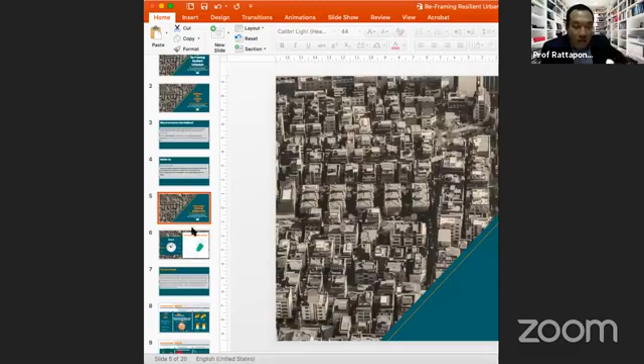Okay, my presentation. So now the audience, we are on the second session. Each of our speakers will explain the case study in their countries. Okay, please go ahead, Nadia. Can you see my slide? Yes, yes, okay, so my case study, I'll just quickly move forward.

Okay, so I'm Zone A, Zone A is again Nepal, Pakistan, India, Bhutan, Bangladesh, and Sri Lanka. I'm representing Pakistan. My case study is from Pakistan, in the province of Punjab, which is the most densely populated province in the country. It's the most urbanized, one of the second most urbanized, and it has a concentration of 5 very large cities.

Lahore, Faisalabad, Gujranwala, Rawalpindi, and Multan. A large part of the province population, because of migration and the attractiveness of these cities, is pulled into settling in these cities, causing a lot of informal settlements, sprawl, slums coming up, deterioration in overall air quality, municipal services, insecure locations, etc., and risk of eviction.

So that's the general outlook of the province. When we come to more detail of the city, I want to show how resilient these cities are, or the city of Lahore is, even not just in light of COVID-19, but generally.

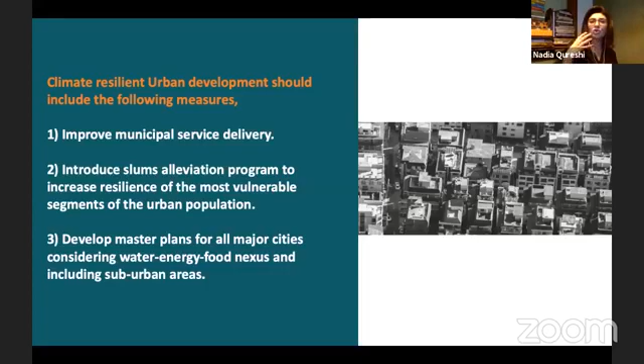Master planning for all major cities - one of the reasons that makes cities more vulnerable is if there's no planning. And the problem is that even when we do have master plans, we haven't done our planning thinking about situations such as COVID-19 or what has happened in Lebanon yesterday. We don't think about disaster risk management, and that's something we really need to start thinking about post and during the COVID pandemic, using planning as a tool.

As an urban planner, this is what I do for relief to the poor given the situation of our cities: provision of affordable housing, inclusionary zoning, slum upgradation, informal marketplaces, formalizing the informal, and pedestrian-oriented planning. Environmental upgradation, industrial zoning, solid waste management, mobility plans to reduce car dependency, and water management plans.

Economic development, industrial corridor development, taking your industries out of your cities, rural development planning, informal economy, zoning to encourage industrial agglomerations, and tourism development plans to help our economies, or the economy of Lahore, to pick up.

Community development, planning for public and recreational spaces, adaptive reuse of public buildings, of older buildings, of historic buildings, so that the public has access, development in research and libraries, etc.

And health and safety, of course: preservation of green and forest land, design and building bylaws to preserve our local ecologies, public safety measures, etc.

So in terms of my case study, which was Lahore - and more broadly, large cities in Pakistan, with Lahore as a focus - I feel these cities have all these issues. This is what I, or any planner, would propose to deal with it. All of these issues need to be addressed.

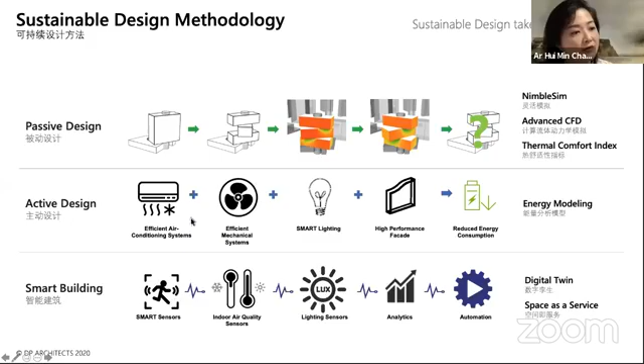And two of the examples I'm going to show you now is a reflection of that. First one is a unique project. It's a hospital project technically, but it's actually combining a hospital, a hotel, and a retail corridor. And this project was a result of, was made possible because of a planning innovation.

First of all, the land, in most cities, when you try to build something like that, you'll reach a lot of planning restrictions. Something that's designated healthcare can only be hospital. You cannot put anything else on it. But this particular piece of land was free for people to propose. You can propose what you want. Not every piece of land in Singapore is like this, but this particular site was a white site. And the business case, what your benefit for the community, you put that all forward to get that piece of land. And the result was this project, which was headed by a few very innovative doctors.

Why is it innovative? Because it actually blended the project entirely. The hotel and the hospital are seamlessly integrated. So you can see that this is actually a cross-section of the hotel. The medical parts are in blue, and the hospitality part, which is the hotel part, and the convention center, and the hotel kitchens and all that are in orange. They are, even though on the outside they look like two separate buildings, but they're actually quite seamlessly integrated. And there's a retail corridor below.

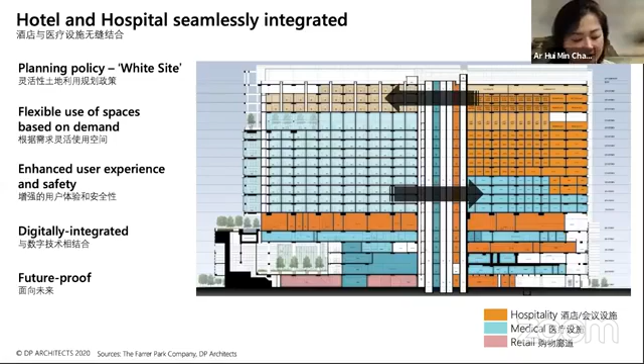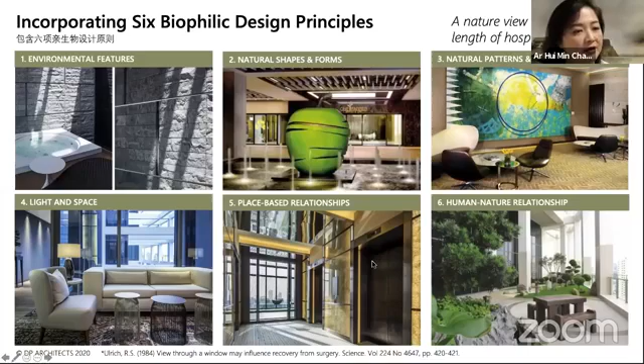The building is designed based on biophilic design principles, part of trying to maintain the well-being of the occupant. It's evidence-based design where biophilic principles derive from research, and we apply them into the design of the space, whether it's environmental features, use of water, nature shapes, airflow, light and space. We incorporated that into the design of the entire building, not just the hospital alone.

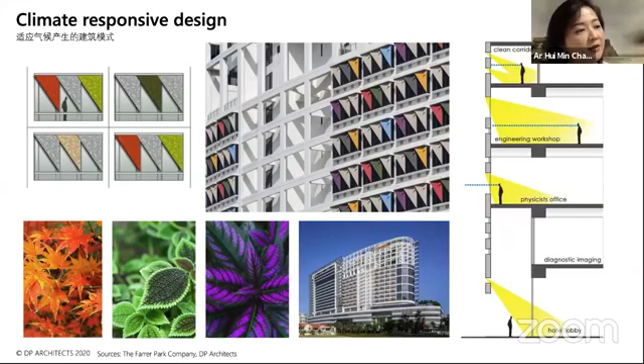Also, climate responsive design: the facade was designed to mitigate the amount of daylight coming into the various spaces. As a result of this integration, the patient experience was quite good. You don't feel like you're in a hospital anymore, you feel like you're somewhere in between. The hospital doesn't really feel like a hospital, and the hotel doesn't really feel like a hotel.

When you integrate everything together, when you are staying in this hospital, you don't have to eat hospital food, you eat hotel food - the kitchen is the same. The digital experience extends right down to the retail part, so you can even order online shopping from the shops below. The digital backbone also linked up all the healthcare information, so doctors can get access to what they needed from their phone and didn't need to be in a particular place, and information could pass seamlessly from stage to stage of treatment without loss.

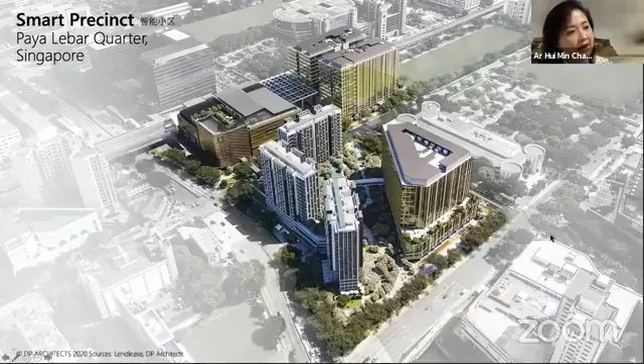So the second example I wanted to show you was more of a precinct level. Although when I say precinct, it's a very small plot compared to the types of precincts you would see in Nadia's presentation, but this is a very interesting example.

When you want to wire up an entire building, people say wiring up an entire building and future-proofing it, investing in digital technology is easy for a building, but to do it for a cluster of buildings - in this case, Paya Lebar Quarter, a mixed-use project - is harder. It's a gateway to Paya Lebar, a sub-city center district in Singapore, with 2 MRT stations crossing. It's a transit-oriented mixed-use development with retail, office, and residential apartments in this small precinct.

It is connected by an underground canal that we turned into a park, and there are roads that cross in between them.

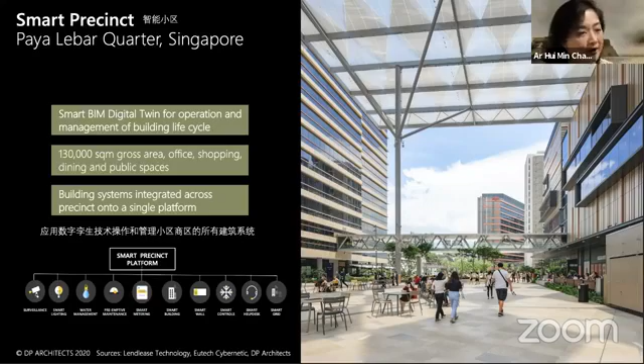What's very interesting over all of that, the fundamentals of good design - the project team also layered on it a digital twin. Essentially every single service within the building across all the commercial projects, whether it's security cameras, lighting, water, and all that, were linked together with a single brain. That single brain really helps mitigate issues, it's basically the single source of truth for situational awareness of what's going on in the project.

What's really interesting is something like that helps you cope with disasters. When something happens in one corner, you can immediately analyze the situation, act upon it, shut it off, and then reroute and have another way to deal with the situation, whether it's security or fire, or trying to understand what happened in that particular place. Every piece of equipment is connected, and data is recorded into this digital twin so you can analyze it and predict the next failure.

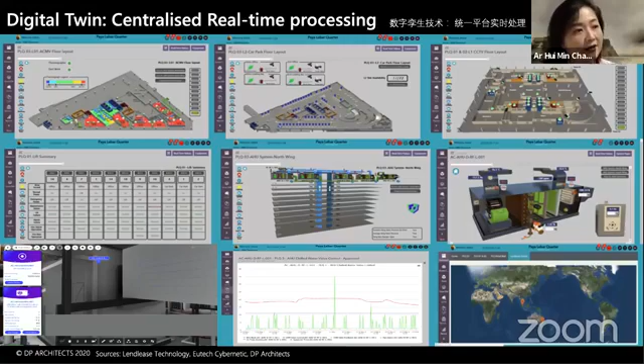So what I wanted to do with these two examples was showcase one of the ways to add or build resilience to change and flexibility: adding a digital layer.

Traditionally, this isn't in the realm of architects and planners, but I think we have to change our mindsets. Educational institutions are already opening up to this, but they need to do more to enable creators of the urban realm to tackle this layer. If you think of structure, interior design, facade as layers of a building, we need to be trained to design the digital layer, because it is our interface to the building.

Everybody goes through their phone as their gateway to the digital world. If your phone breaks, there's no other gateway. What if the entire building is an interface? That's a way to look at the future and how you build resilience in your environment.

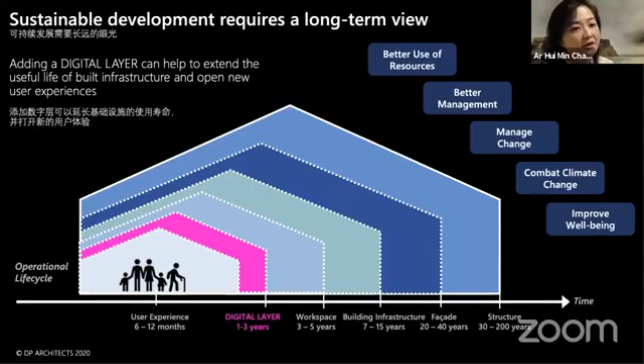Since we're talking to an academic crowd at this ACAE seminar, I wanted to seed this idea: what if we mapped out a future of responsive buildings, where the physical environment—whether urban environment or smart city—is all woven together? Imagine things we already do for comfort and well-being—air conditioning, cameras, space, light, sound, even surfaces or signage systems—all linked together into a single brain.

What would your future environment be like? It will be more than physical—the way you interact with the digital world, your virtual and physical worlds will merge more. It's one way to build more resilience in our environment. That's how I'd like to end, and that's a point of discussion I'd like to raise as part of urban resilience.

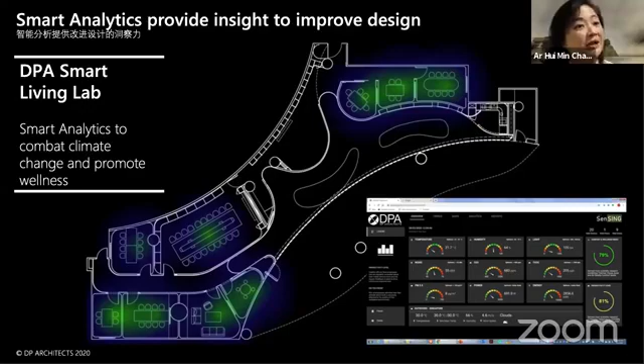One last slide to show we're starting to do this in our own office. Before you can create responsive spaces, you have to measure them and understand how they perform. As architects, how often do you actually go back and measure how well the spaces you've designed actually work? That's something we're lacking in our industry—we don't go back to figure out if it worked, or what lessons we learned. That's one thing we can do better.

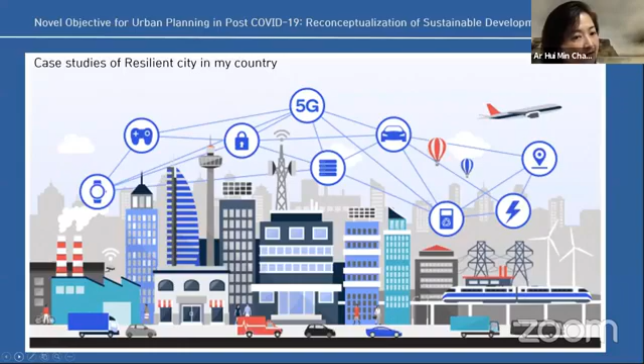Fourth, mitigation of the regional supply gap and creation of a technological network. Fifth, emphasis on software and system development, for example 5G. Sixth, technologies answering environmental and social needs must be prioritized. Seventh, human desire for direct experience. Eighth, creation of urban space environments to host smart technology.

This is the Seoul City Smart City strategy, and from this we build a resilient city in Seoul. This is an urban case in Seoul.

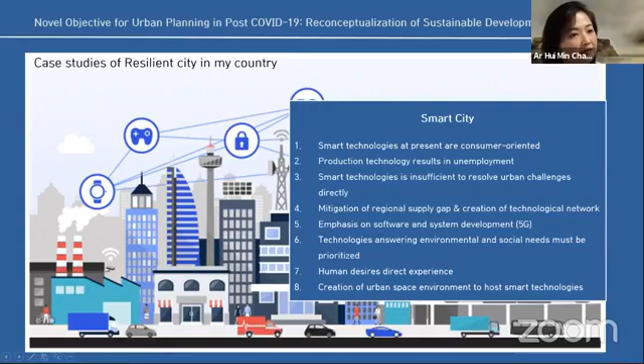So how can we rearrange existing space? We need to think about design again, so we approach one thing: eco-friendly complex space.

In Vitruvius' time, three elements of architecture were very important. Then we add two items: one is environment, second is safety, in addition to Vitruvius' three elements.

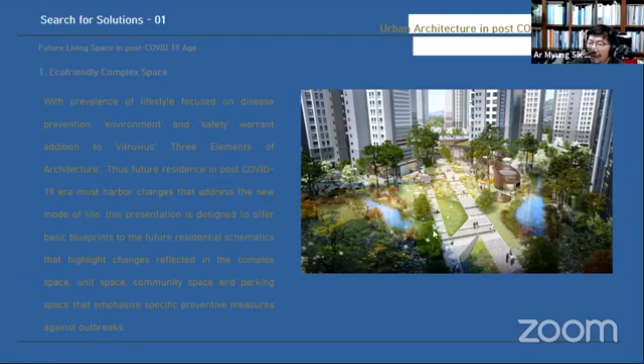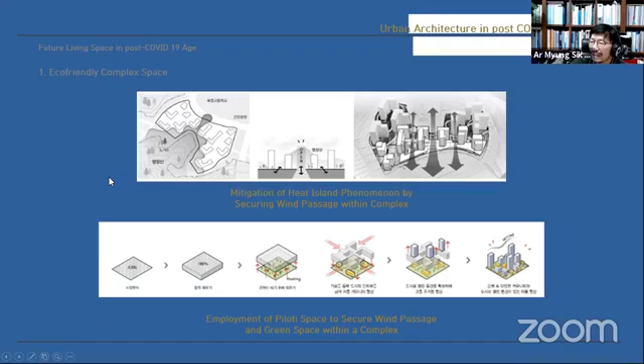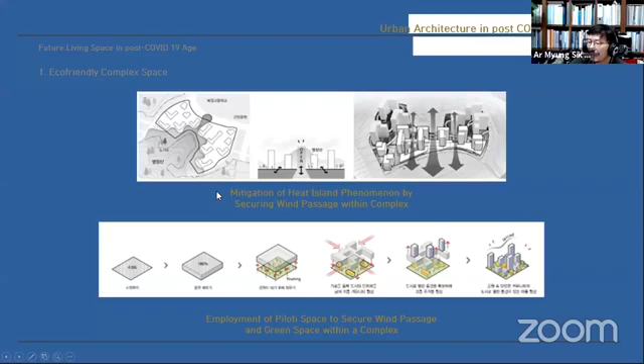Let's see the first thing. Eco-friendly complex space needs wind penetration to give fresh air in housing areas. This is one example of how to give fresh air in a residence site area. This penetration wind also mitigates the heat island phenomenon by securing a wind passage.

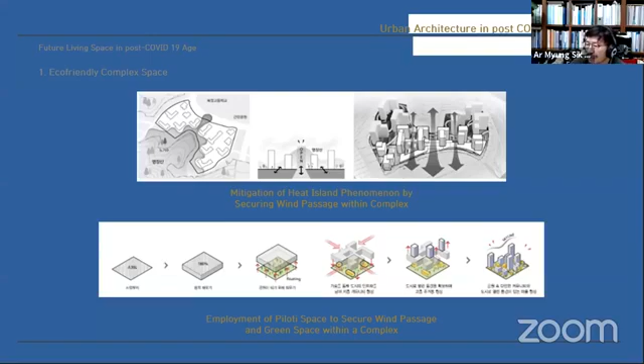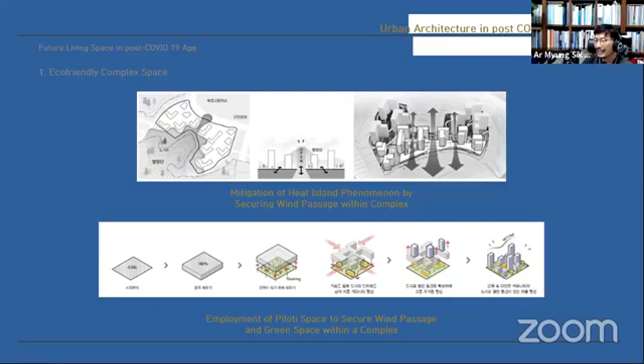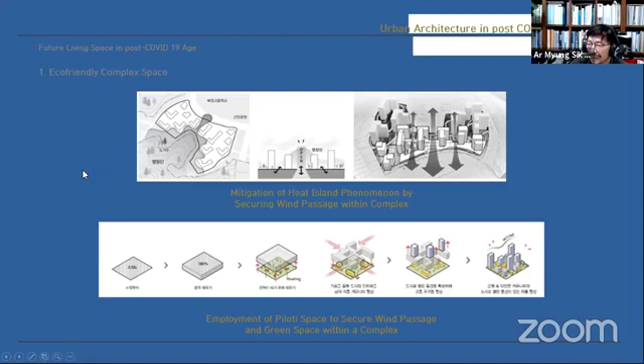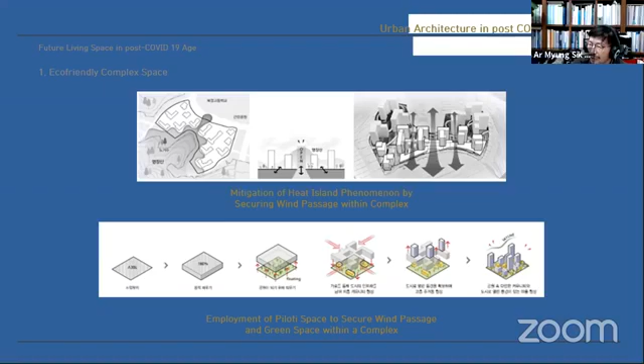Also, we use pilotis space, employing piloti space to secure wind passage and green space within the complex. Then we create a good environment to cover COVID-19 infection. This is one design example to cover COVID-19 infection, also giving social distance.

The second example is unit space. Every room function, every residence has a one-to-one function in indoor space. But we must change this one-to-one function space, so the home becomes a venue for work, repose, shopping, and entertainment. In unit space, we make multi-use or flexible utilization, so shape changes, and space changes. Home is now more than a location for respite and departure.

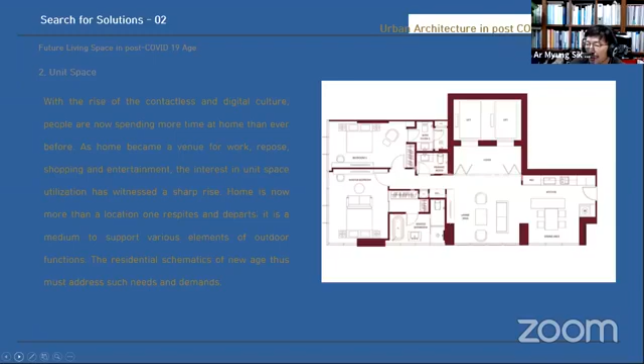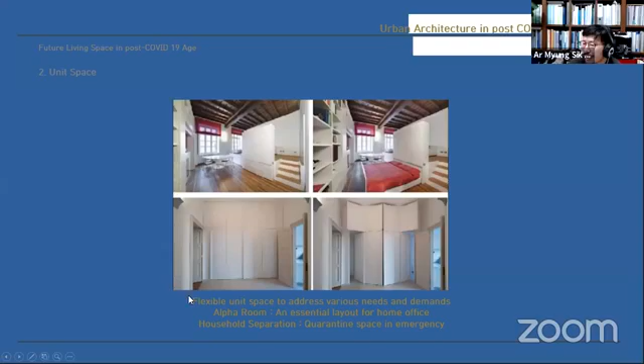This is one example of a residential schematic for the new age in the post-COVID-19 era. Now I want to show another thing: unit space. This is real time, usual time—daytime workspace, nighttime bed space. Sometimes it's a fixed clean area, but during work time the furniture changes by function. So we use indoor space as a flexible unit space to address various needs and demands.

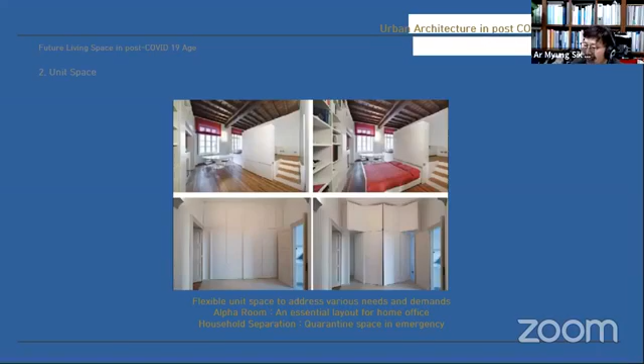We also add an alpha room as an essential layout for home office. Then we have a dual function in the home area—sometimes office work, sometimes home stay. So household separation changes.

Also, the front door is changed into a sanitary space, to block and prevent outdoor pollution. In the case of the kitchen, we change the kitchen space to a lower location for hobby or activities. This is usually a space change to minimize contact through separation and privacy.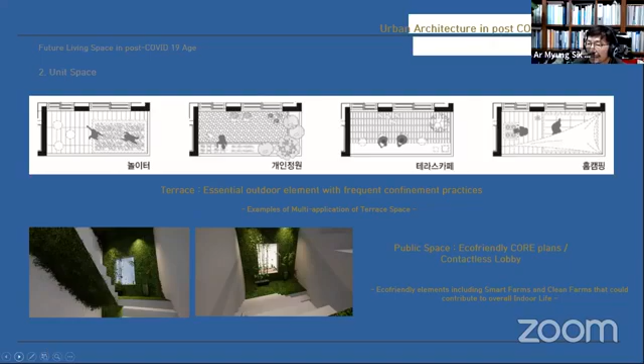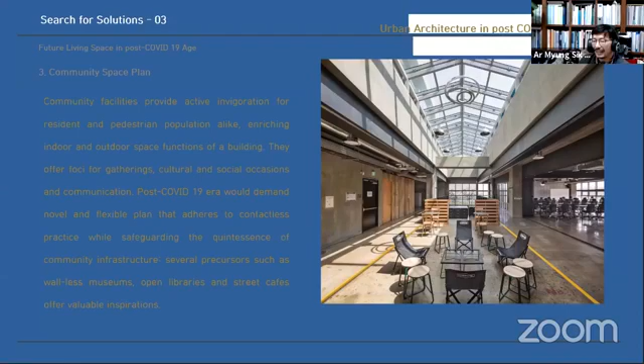Let's see the next community space plan. Social distancing gives a change to community space plans, so the post-COVID-19 era would demand novel and flexible plans. Let's see.

Primary prevention space is like this screen. We also give a buffer zone to separate one space from another, and also give a natural circulation. Community space plans need to control three issues. This is an example for community space plan.

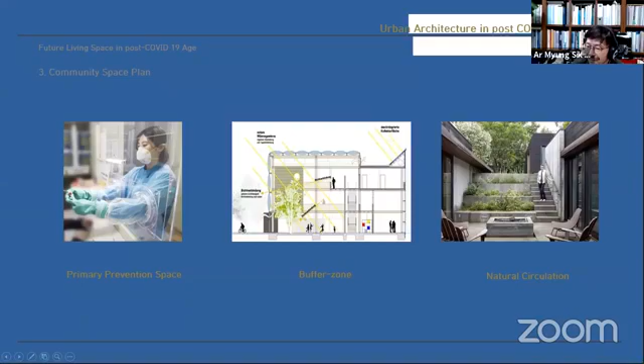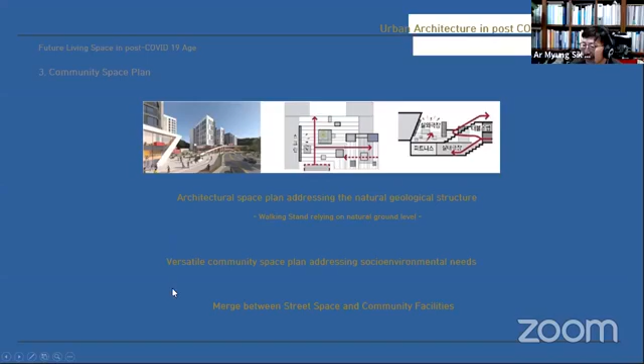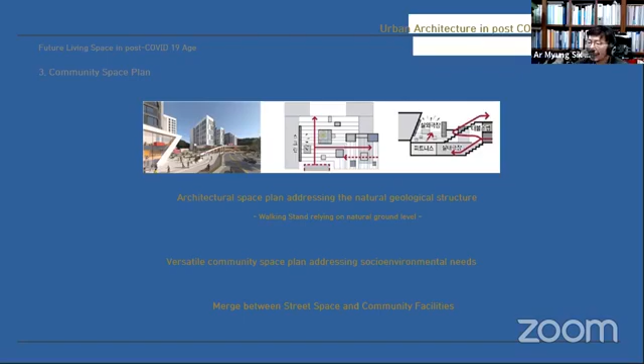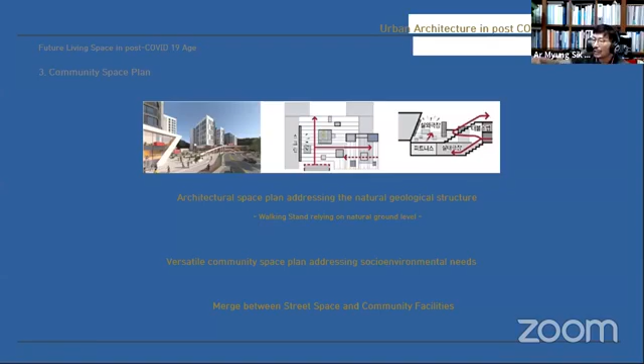Another thing, we use level difference to separate infection effect. Then architecture space plans address the natural geological structure—walking stand relies on natural ground level, like this. Versatile community space plans address socio-environmental needs, so we merge street space and community facility. This screen shows the level used to separate each function in community space.

Let's see another thing, the last design case: vehicle space, parking space. When we face COVID-19, everyone uses personal vehicles to protect against infection. So what we take is vehicle use space—let's show one thing.

This is a market drive-through—a pickup space for a marketplace. You never go into the shop area; you just come through the shop area to pick up desired items by car.

Also, it's a clean drive-through—a drop-off zone separated from inside and outside, controlling the car drop-off zone. This is an example of how to use vehicle use space in a driving space. This photo shows a drop-off zone installation in the case of the post-COVID-19 age.

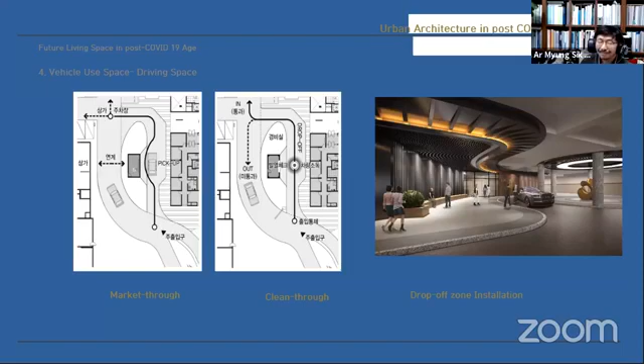I think it's quite interesting because you were talking about going from the bigger scale into the more human, architectural scale. Even though the pandemic crisis really separates us from each other, there's a way. The Professor already talked about how he integrated systems of natural ventilation and circulation into design to help, even though we're still in the same place and space, the design helps separate us to maintain physical distance for safety. So it's a really good example.

It's also giving us our life back, because in the beginning I think everyone knows we really like living in our own house, right? That's why we get bored with our space, and then we try to connect with outside and with nature. So it's quite interesting.

So, as an architect, I'm also an urban development expert and a planner. So I'm looking at it in a broader perspective, and it was very interesting for me how Hui Min explained things about mixed use, compact development, and transit-oriented development. That's something that I come to.

My approach to this is two-phased. One is as a planner, as an urban planning expert. If I talk in terms of planning, I think for cities, especially with issues such as the ones I explained in my presentation earlier, like Lahore has - overcrowding, inequality, a lot of migration, inequitable distribution of wealth, non-availability of low-cost housing, and the spread and sprawl of the city.

One of the things we can do from a planning point of view is managing urban densities, looking at both our social and physical infrastructure. If we do not make our cities more mixed use and compact, especially in a country like Pakistan, we don't have the physical, social, economic capacity to cater to the sprawl. So as a policy maker, we need to build on our systems, decentralize them, let planning go down to the local level, and give more empowerment to our local government systems to manage these issues within their areas and localities.

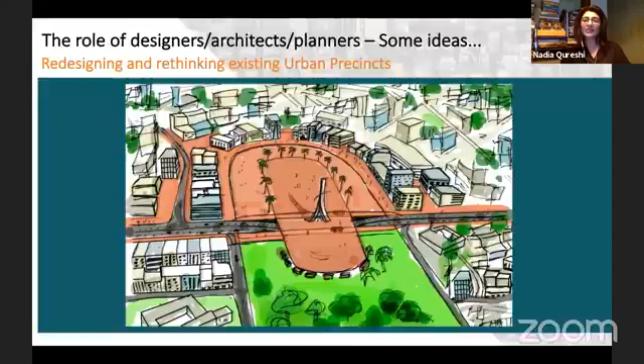So this is from a planning point of view. From an architectural and urban design point of view - and this is exactly, Huimin, when you presented your slides, I was jumping with joy, because that's exactly what I think we should be doing in our cities. We need to rethink and redesign our urban precincts. We need to make sure we reduce car dependencies in these precincts or blocks. We introduce walkability, eco-friendly and multi-use spaces, and like Lee said, areas with natural circulation and buffer zones - all of this needs to be introduced within precincts and blocks. We need to start thinking at that neighborhood level.

We need to start reclaiming our streets, because our streets right now are really just for people who own cars, and they don't accommodate a person who does not own a car. So especially, we need to reclaim the street - larger commercial streets and corridors - for the people. We need to start thinking more of placemaking, more at a human scale rather than a larger scale. Everything said by the other presenters in their case studies shows exactly what I would suggest we start thinking on and doing for a country such as Pakistan. And that's it from me. Thank you.

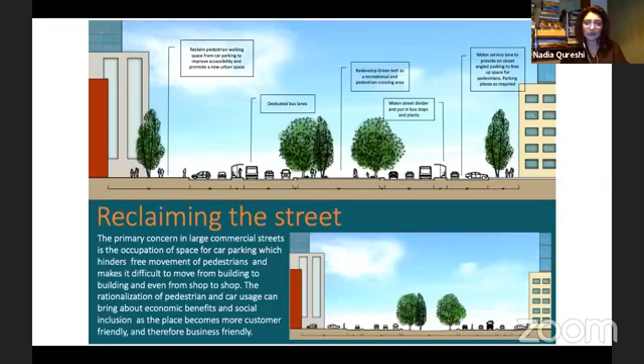Thank you, Nadia. Your view is really interesting because you are a planner with a background in architecture, so your reflection links the social aspect with physical design. It's really great, and I love the idea that you need to explain to people to understand about economic geography. That's really great. I think it's a good point that we have that background as an architect, so we can understand and link within the platform of urban development, right?

Okay, so let's go to Huimin as the practitioner. What about your role as a designer for coping with the shock in the future and for sustainability in the future? Huimin, please.

Thank you. I think the role of the architect needs to change or evolve, where in the past, especially as practitioners, we would very much be faithful to what our clients ask us to do. I think because we have a responsibility as people who look to the future - planners and designers obviously live and look in the future - we need to pull people away from being conservative, because when the future is less predictable, people tend towards a more conservative standpoint. They don't want to do that much, they're more selfish, they would not go for the greater good as a default. As a practitioner, as a professional, we need to advocate for the greater good, and we need to advocate for sustainability, social equality, inclusiveness, and those have to be very conscious. If they were not top of agenda in previous designs, they have to become top of agenda now. And thankfully, there is a community out there.

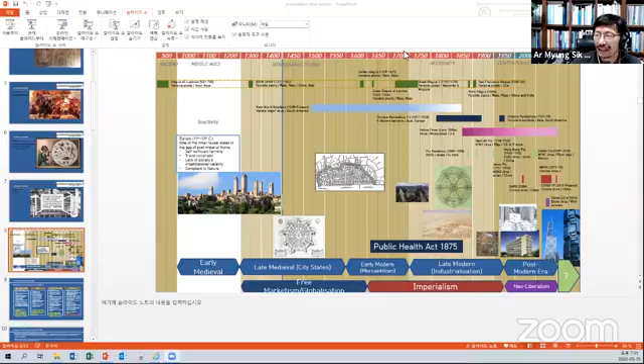So when I analyze these items, we must prepare some design change in lifestyle and also socioeconomic change. Then we prepare how we can connect high technology to renew and redesign the residence area and lifestyle. This is my preparation for the post Corona-19 age.

Thank you, Professor, that's it. Okay, thank you. I love the idea that you try to explain the link between the timeline of humanity, that we face or encounter many shocks in the past, and now we try to develop things. The most important thing is we concern about public health and social welfare, so we can see the measures from humanity, from many laws and regulations. For example, in Bangkok or in Singapore, we start from hygiene in urban areas and society.